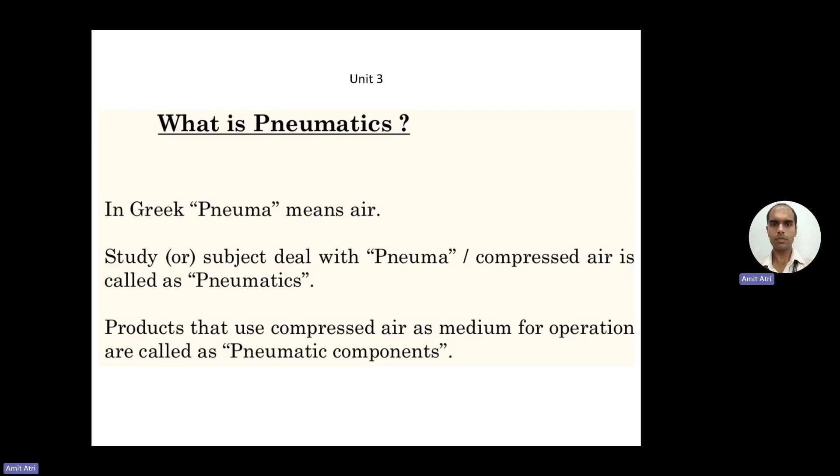Today we will discuss the pneumatic controllers used in robots. So first of all, what is pneumatics? In Greek, the word pneuma means air. So pneumatics is a system that uses high pressure or compressed air. It is a study or subject which deals with compressed air. That is pneumatics. The products that use compressed air as a medium for operation are called pneumatic components.

Now, a mechanism which uses air pressure to apply mechanical force and displacement. So this is the introduction to the field of pneumatics. The pneumatic devices we use are basically binary actuators, so either retracted or extended. In the diagram, the first figure shows a retracted cylinder, and the second shows the extended cylinder.

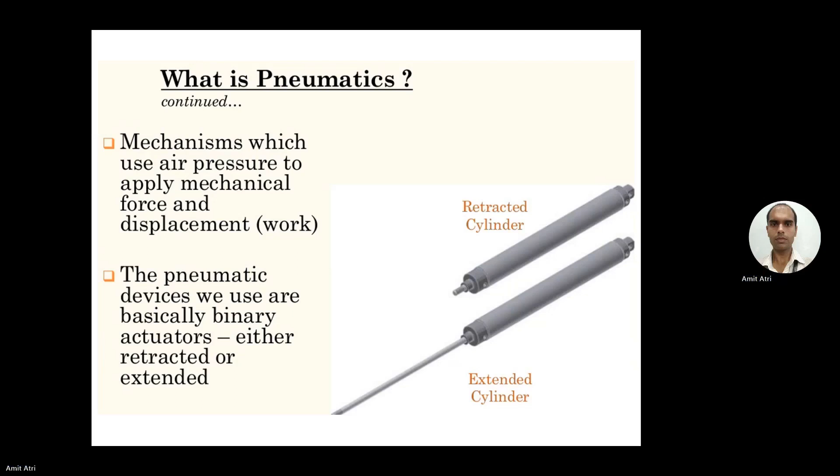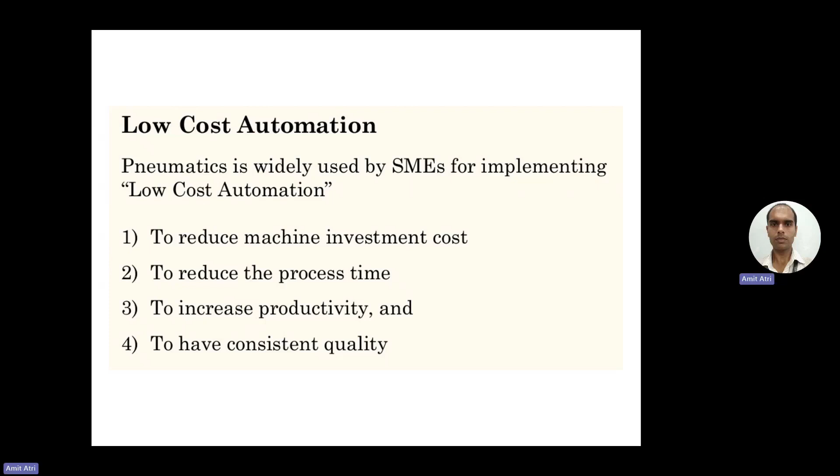Low cost automation. Now we are coming to the field of automation where we are using these pneumatics. Pneumatics is widely used by SMEs for implementing low cost automation. It also gives an advantage that the cost of the automated system using pneumatics is less. It is used for reducing machine investment cost, to reduce the process time, to increase productivity, and to have consistent quality.

Now coming to the advantages and limitations of pneumatics. Advantages include their simplicity, they are easy to control, and they can apply a lot of force from a small light package. So the size is less and we get a larger force, limited by air pressure and cylinder diameter. The speed and force are infinitely variable, so we can vary them over a large range.

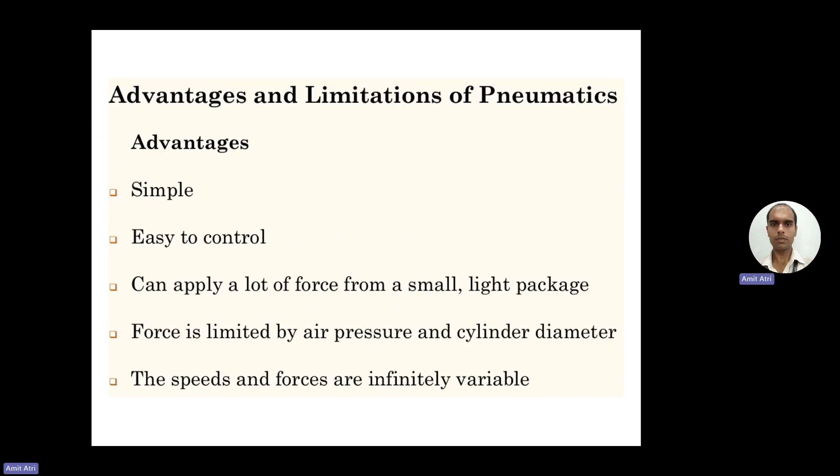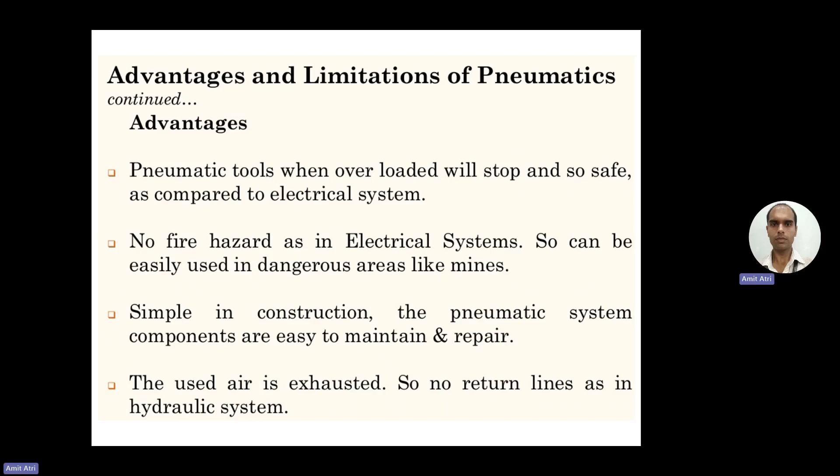Pneumatic tools, when overloaded, will stop, and so are safe compared to electrical systems. It's automatic; they will stop when overloaded. Next is no fire hazard compared with electrical systems, so they can be used in dangerous situations like mines. They are simple in construction. The components are easy to maintain and repair, and since they use air, we don't need a return path. We can freely release the air into the environment after the task is done.

Now coming to the disadvantages. Smooth and uniform speed against loads is not achievable as in a hydraulic system. Compared with a hydraulic system, the performance is inferior in terms of smooth and uniform speed. Then, beyond a certain load, usage of a pneumatic system is expensive.

Now, forms of output: we can produce linear motion, rotary motion, and semi-rotary motion using a pneumatic system. Using these types of motion, we can apply the pneumatic system in functions like pushing, pulling, lifting, feeding, clamping, pressing, and forming.

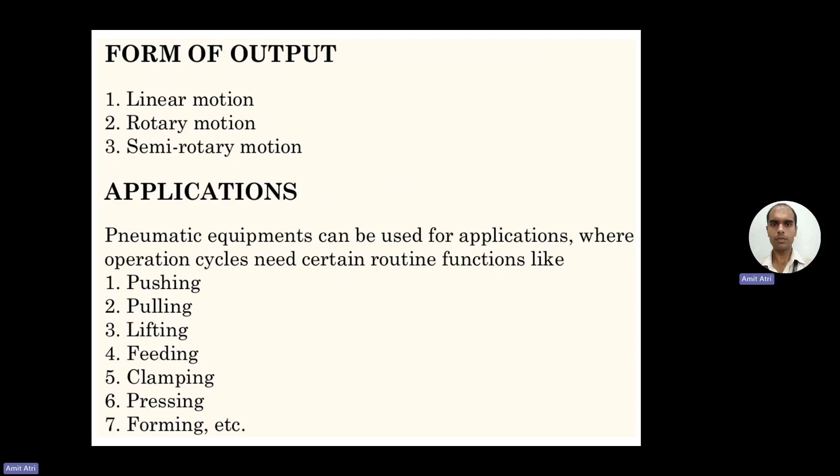Now the areas where we use pneumatic systems: air brakes of automobiles and trains, air engines, pneumatic drills, pneumatic presses, power presses, automation of assembly lines like the automobile industry, packaging, bottling. A very common application is robots in the industrial sector. Then pneumatic vehicle cleaning, anti-aircraft weapons, pneumatic launchers, vacuum pumps, pressure regulators, cotton mills, dairies, forge shops, foundries, metal forming, paper mills, printing. So a wide range of industrial applications use pneumatic controllers.

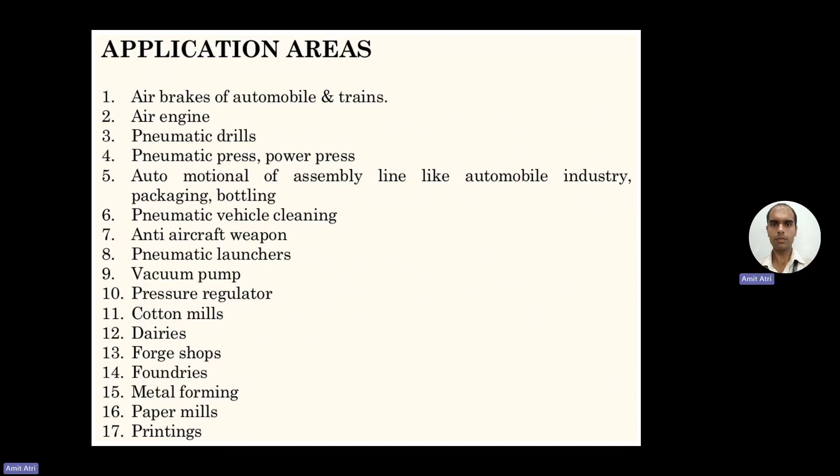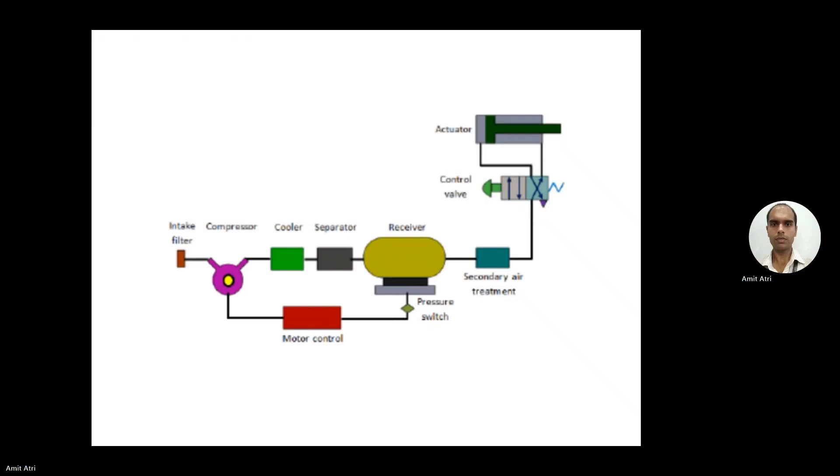Now this is a diagram indicating the major components of a pneumatic system. The actuator, where we get the output, is controlled by a control valve. Before that is the system used for storing the air and creating the pressure. This system includes an intake filter, compressor, cooler, separator, receiver, a motor control, and secondary air treatment, meaning the air that is treated.

Just a briefing about the components shown in the block diagram. Air filters are used to filter out contaminants from the air. Next is the compressor. Compressed air is generated using air compressors, which are either diesel or electrically operated. This system has a number of components so as to produce a desired movement. Based on the requirement of compressed air, suitable capacity compressors may be used.

Next is the air cooler. During compression, high temperature air is produced, so coolers are used to reduce the temperature of the compressed air. Next is the dryer. The water vapor or moisture in the air is separated using a dryer. Control valves are used to regulate, control and monitor direction, flow, pressure, etc.

Then the air actuator. Air cylinders and motors are used to obtain the required movement of mechanical elements of the pneumatic system. Then the electric motor, which transforms electrical into mechanical energy for driving the compressor. Last is the receiver tank. The compressed air coming from the compressor is stored in the air receiver. From there we can supply the air to the actuator through the control valve or control system as and when required.